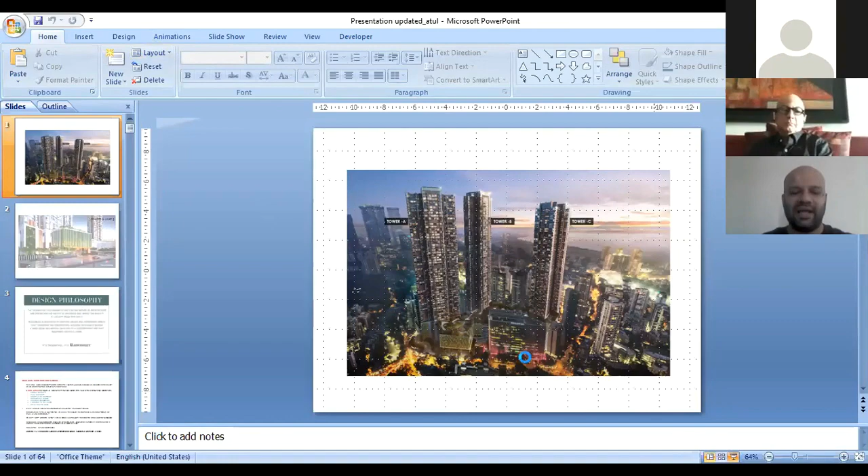I'm also extremely delighted to introduce you to one of India's leading, and I would dare say, one of the top 10 interior designers of India, Mr. Alfaz Miller, who's with us. Alfaz has been associated with Rustomjee not just in a consultative capacity, but he's also done a lot of work in some of our show apartments, and these show apartments look absolutely stunning. I don't really want to introduce Alfaz because I think the design world knows him really well. He's done some stellar work for the GVK International Airports, the Mumbai International Airport, and the Bangalore International Airport. He's also done a lot of work for hotel chains, including the Taj, and of course a slew of corporate clients and the who's who of the upper crust of the city.

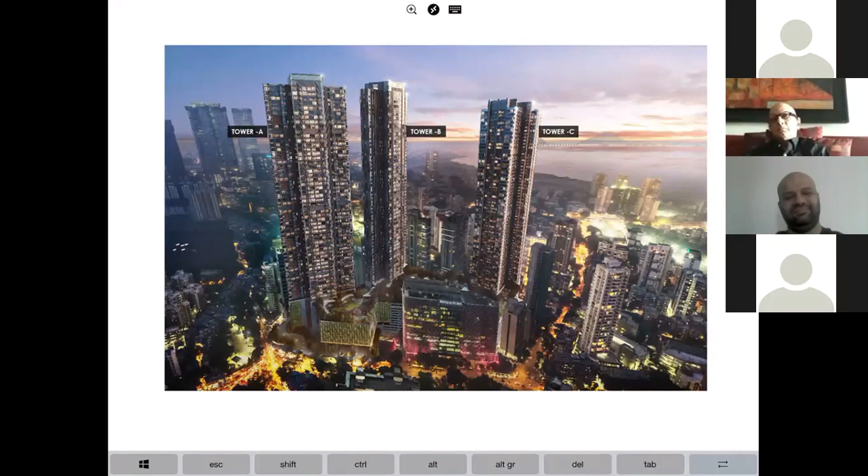So what is the concept at heart? What are the things on which the entire ethos or basis of Crown design stands? It starts with the basic design philosophy that permeates all Rustomjee projects, and we genuinely believe it in letter and in spirit.

I wouldn't read out what's there because everybody can do that. We genuinely feel we need to craft unique and responsive spaces because the lasting nature of architecture and design has the ability to influence and impact the quality of life for those who use it. And this is absolutely true - we've seen it happen in projects. We've seen customers with tears of joy in their eyes when they actually start living in our projects.

So what does Crown offer that is unique? Shekhar talked about it, yes - most of you must have heard it from a salesperson's point of view. Most of you've heard the marketing jargon, the marketing spiel.

But I'm not going to talk to you about rate per square foot, cost per square foot, EMI or payment plans, nothing of that sort. I am here only to talk about what has gone behind in the design, why we feel Crown is unique compared to all the other peers around.

So apart from being an iconic gated community nestled within the concrete and glass buildings you see all around, the prime concept we thought about when we looked at Crown in the entire South Central Mumbai micro market is actually capturing nature in its purest form.

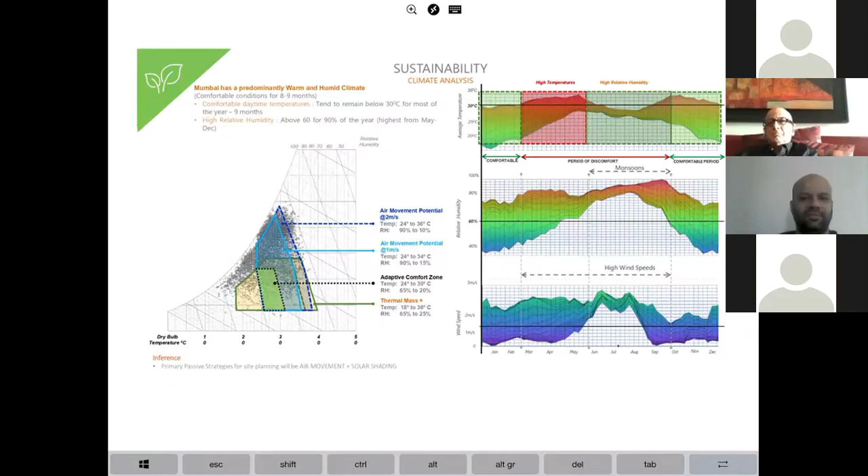One is sustainability, part of the soul, where detailed climate analysis is done. We looked at rainfall, we look at winds, we look at the heat map, we look at all the seasons of the year.

One important thing we also look at in sustainability is envelope design. What kind of envelope should we have for the design? What are the baseline metrics and design considerations we need, from walls, roof, glass, window to wall ratio, the kind of heat that would come in? Because at the end of the day, it is the user who is going to spend his hard-earned money paying that electricity bill, so I should always keep the user in mind.

With post-COVID conditions, how are we allowing visitor entries? How are we segregating different entries - a separate maids entry, a separate guest entry, a separate entry for Ubers and Olas, how is the entry touchless? We had already designed the backbone with this in mind, and we've taken it to the next level, tuned it up, and ensured touchless entry as much as possible, majority addressed with the help of RFID, radio frequency identification device.

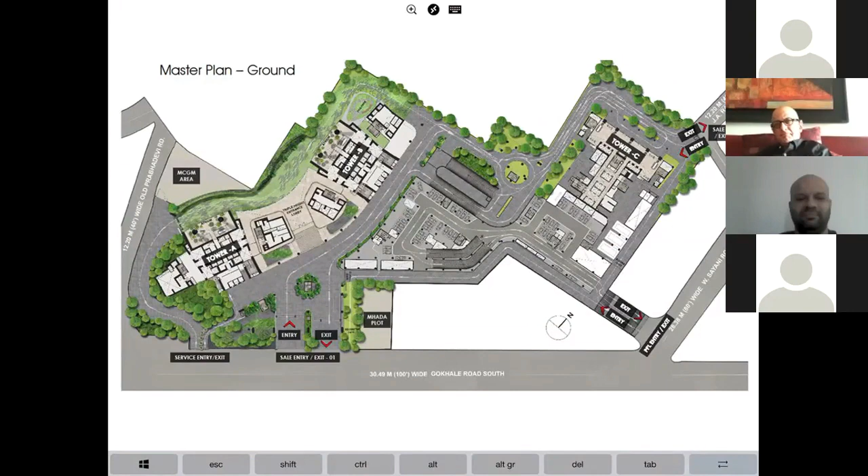So those are the things Shekhar talked about. In terms of the master plan, we talked about segregation of traffic - a separate entry for service staff, a separate entry for sale, a separate entry for fire tender movement, all that is there. We have clearly delineated ramps. Movement in and around the building is something very, very crucial.

At Rustomjee, we strongly believe people don't buy what you do, they always buy why you do it. And what you do simply proves what you believe in. For all of you today, the main aim is to shed more light on the why, or the underlying thought of design. For those who invested, or are on the verge of making that final closure call, understanding this design intent is very important, because it not only affirms belief in the product, but most of you would be pleasantly surprised by the varied, unspoken aspects of the project that deal with dynamic community interaction.

Things like the flexibility of design that we have already planned in the project, you could currently start utilizing now. You suddenly feel, oh, my project has already thought about it. And I think that makes a huge amount of difference. Adoption of technology, renewed focus on well-being of the occupants. Many things are already there. We're just now able to highlight them and showcase them in a much better light. And I think nothing is more important than the well-being of the residents and occupants, and that makes the project adaptable to ever-changing uncertainty.

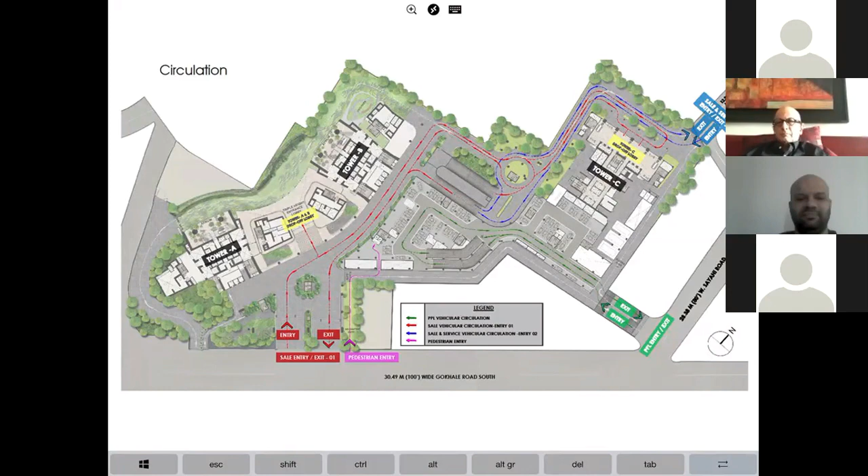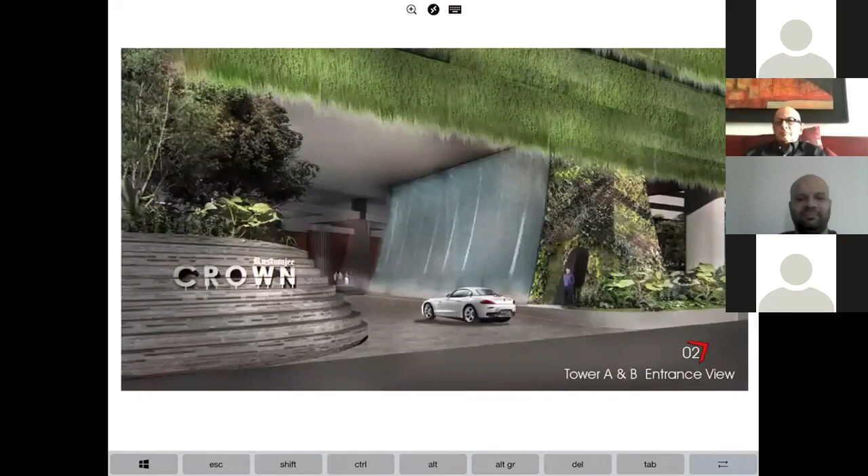So I just love to go through these images. These have already been shown, but the project is so dear to me that every time I look at it, I always get a high. I feel, oh wow, this is something that I'm going to create. This is something that I want to live in. This is something that I aspire for. This is something where I want my guests to come in.

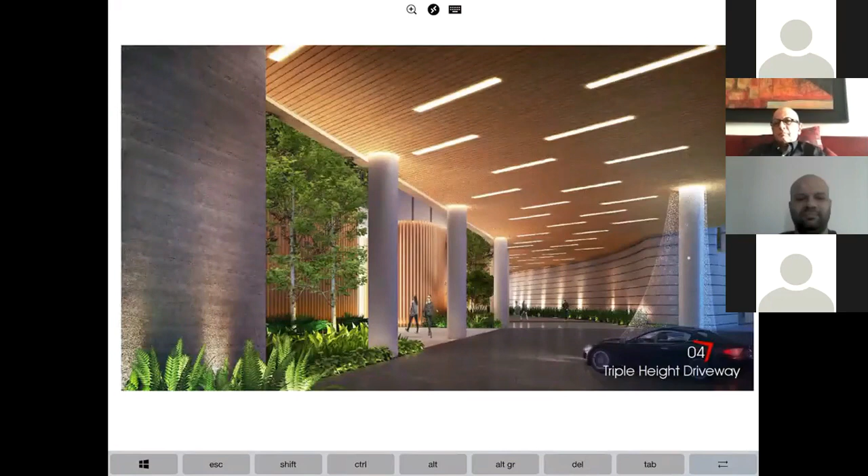Utilization of landscape, utilization of interior design, utilization of the small aspects of lighting - I think this is one change that we've done. If you see in the picture, this is the original concept where you see 40-meter tall atriums with hanging trees. Nobody ever conceived it. There was one tree somewhere in Israel that was hanging, and people made a hue and cry, getting 1 million likes on YouTube. We have hung more than 17, 18 trees at different levels.

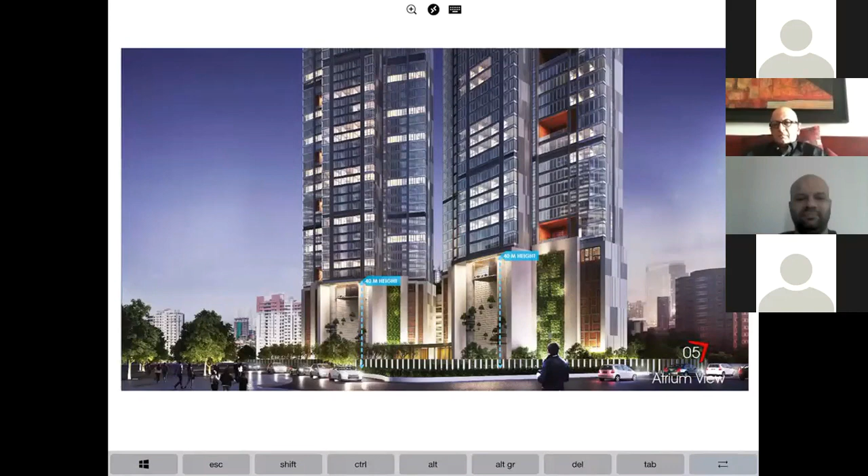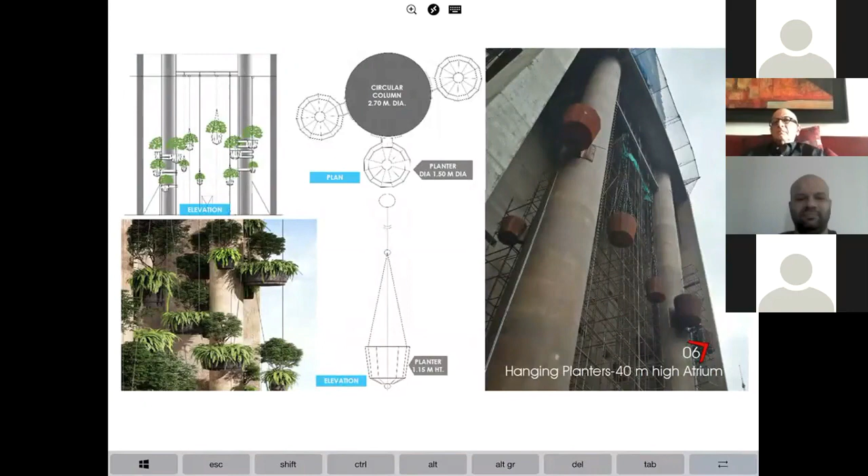So what was it? There was a second lobby of Wing B. We could have easily replicated it there, but we said no, we should do something different. So this was the initial concept. What you see on the right is the hanging planters in that atrium. The planters are more than, some are 8 feet in diameter, some are 10 feet in diameter, to take really, really big trees.

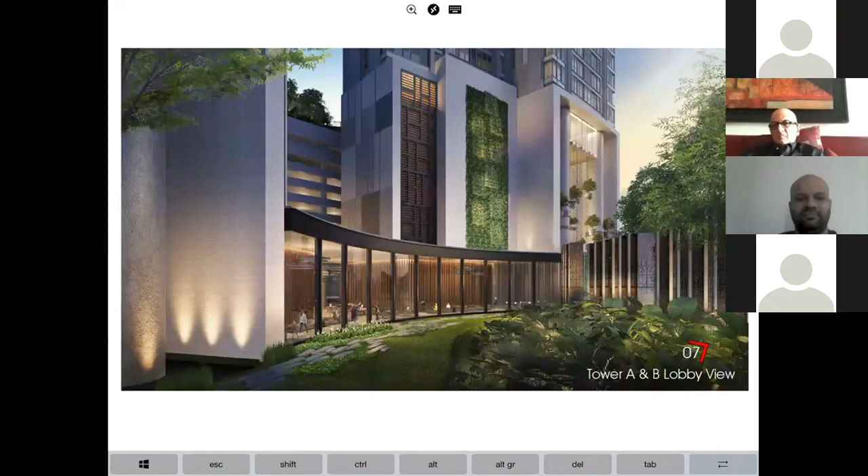So this is what we would actually end up doing at the end of the day, and this is what we would love to create as a final product. But this is what most of you have not seen. Repeating what we did in Atrium A, in Atrium B would have been gutless in our opinion. So we always love to challenge our own self. We said, why not create something that is different, that is more usable than just being visual?

So why not create an adventure playground for kids and teenagers alike? Why not make use of volume to ensure that I have created something which is totally different? Create a concept of a floating tree, or a floating pavilion, or a floating machan as you call it, and then use nature, which is our backdrop for everything we are talking about, to actually enhance the space and make it more utilitarian.

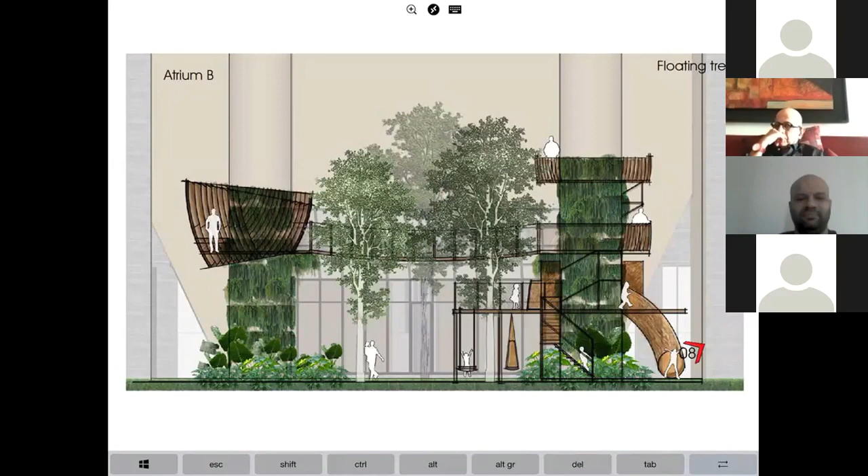I think the way we talked about the master layout podium amenities - when we designed that, people felt, why create so many places, the space will look small, small, small. The answer is no, my friend. The space looks better because you experience it better. The aim was always to declutter, to decentralize and de-densify amenities so that they are spaced out. People can use them in varied age groups and each amenity can be used differently.

And things like intelligent elevators was something that we thought of already, we just adopted it. We just had to upgrade our software to ensure that we have touchless entry - nobody touches any elevator panel. You can call the elevator from your mobile. If the elevator is under maintenance, you will already be informed. There is an anywhere destination control system. So in terms of technology, wherever the technology has reached right now, we are already there, and we've kept the backbone for any future improvement.

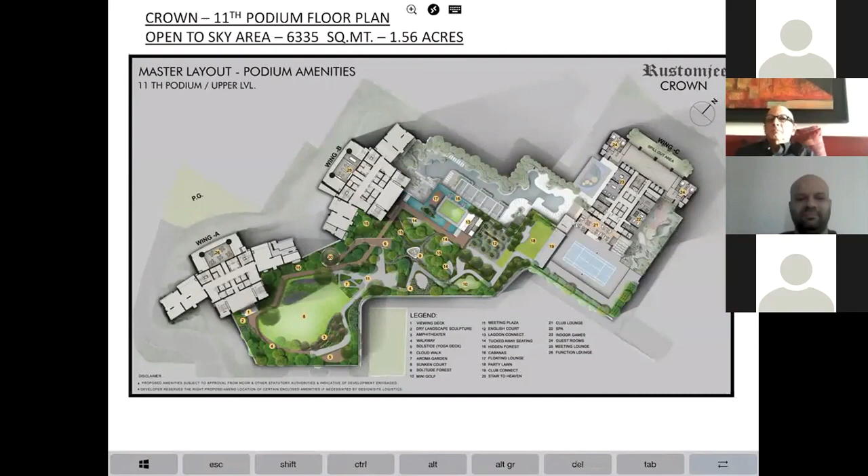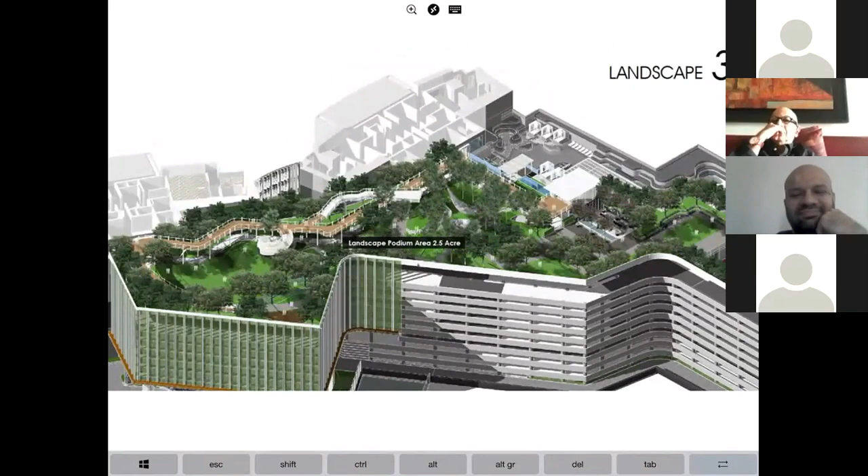The things about two separate ramps, the car parking areas, the way we look at landscape, where we look at indigenous nature of landscape. This is landscape without the trees, and this is landscape with trees. Whale of a difference, simply because it is a softscape that gives life to it.

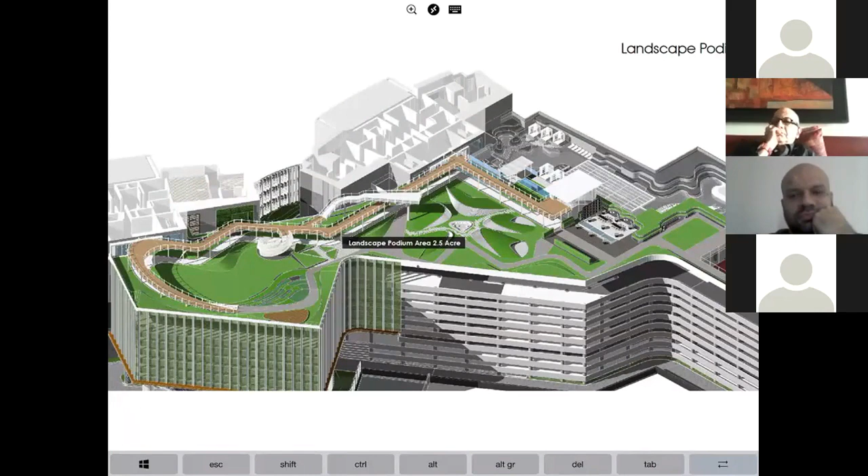The multi-level boardwalk, or the walk as you call it, at different levels, actually lets you experience landscape at multiple planes, at the ground plane, the mid plane, the top plane. So you see the treetops, the branches, the foliage underneath. And everything has a thought - why landscape at this height, at that level?

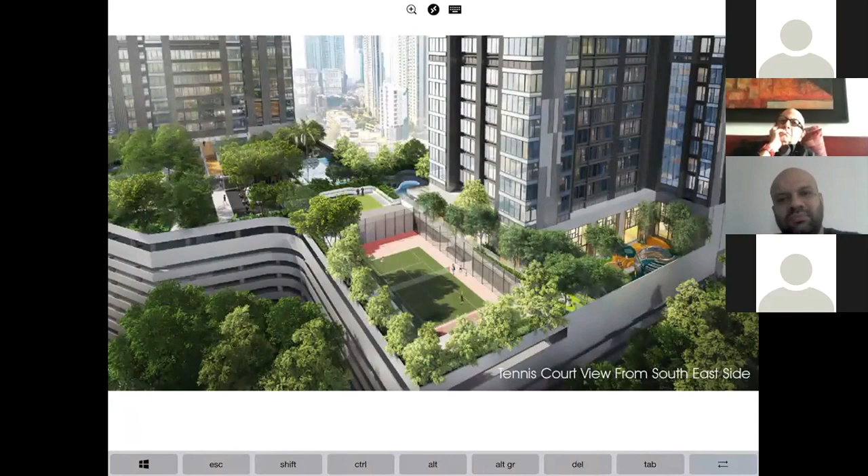Simply because this is an urban location, and there is a problem called urban heat island. So the amount of landscape that I have absorbs the entire heat generated from the reflections of the glass, the reflections of the concrete, the reflections of infrared radiation that is all around. The temperature on this podium is going to be 4 to 5 degrees lower than any other podium. I can bet you that, simply because of the level of landscape that we have.

The kind of water body that we have, a falling cascade - why? Because I want to reintroduce that level of water vapor, that level of moisture in the atmosphere, so that it doesn't feel dry and sultry. So there is a thought behind it.

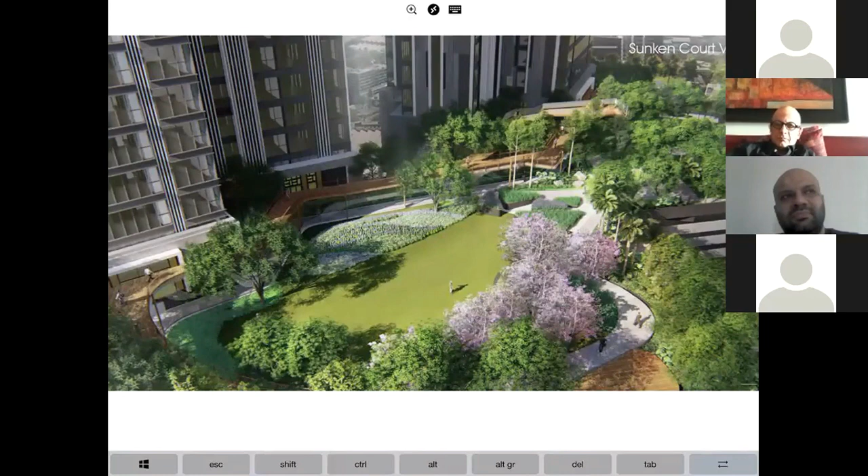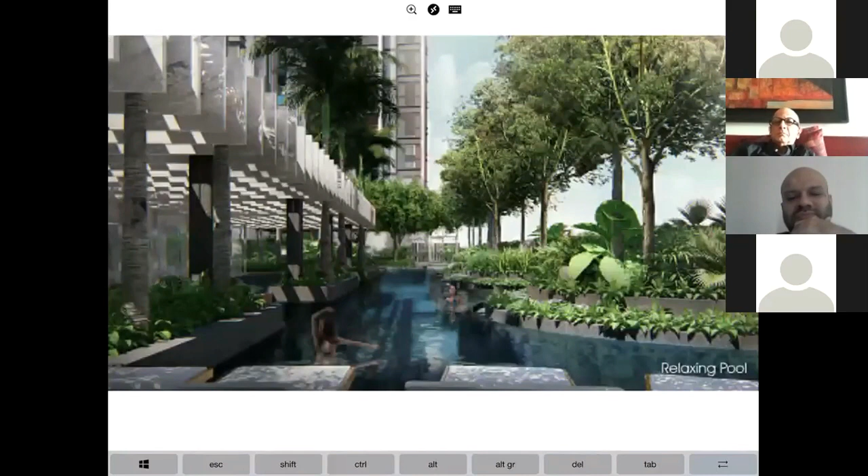Look at the level in which the pool was thought about. It is an all-weather pool, obviously there as a part of the lagoon. So you have a relaxing pool, a pool got an outdoor theater, a leisure pool, a shallow pool where people just come to have fun and frolic, and then you've got the lagoon pool. I'm skipping them fast because all of you have probably seen all these images.

And the Cascade Waterfall - this is what we are talking about. When the water cascades down, it loses heat to the atmosphere. I can use that to actually cool this entire place down.

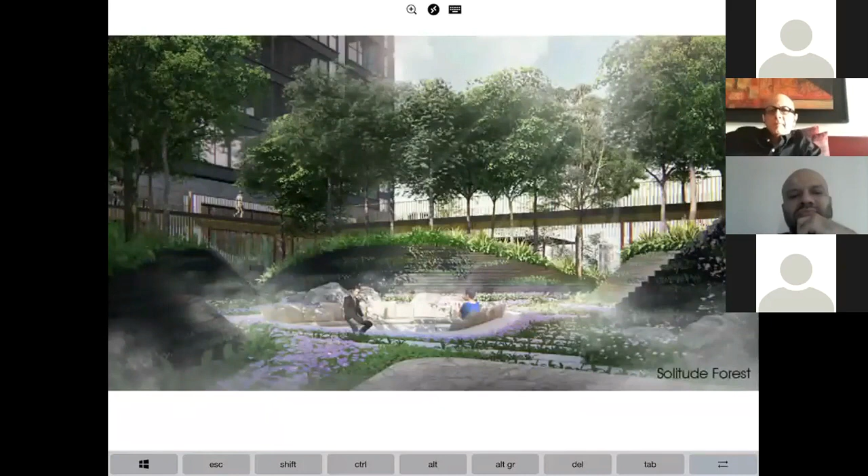Then there are misters and foggers, and then there are actually speakers in this entire landscape, because my environment cannot be dead in the night or in the evening. It has to be throbbing, dynamic all year round. So the kind of landscape or trees that we've selected will be flowering across seasons - it's not that only spring flowering is there, it will be flowering across seasons.

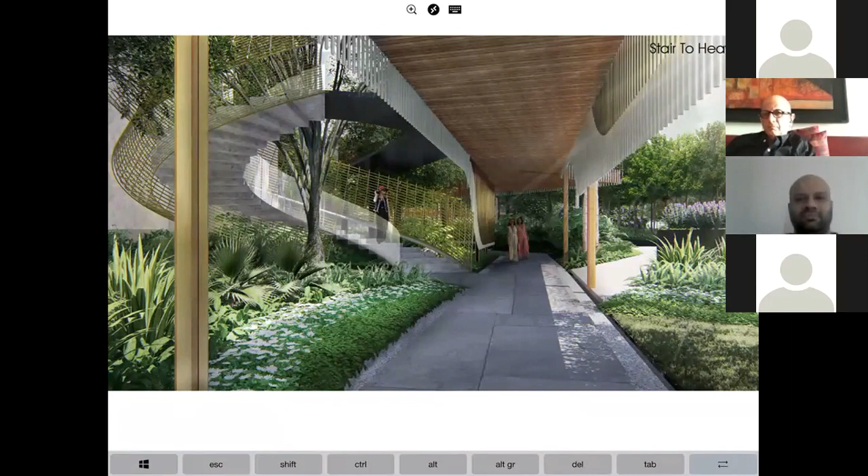Also see this, we have a boardwalk on top. How does it help us? During the rainy season, if I still want to access all the amenities at different levels, it actually serves as a covered walkway. So it serves both purposes. There is a design, and then there is a thought behind the design. It's not just done because it looks good, it's because it serves a certain purpose. And I think understanding that makes sense.

Having a large elevator with 7 feet wide doors to transfer your furniture - I doubt how many projects in South Mumbai or South Central Mumbai have it, and this is one of our projects. The speed of this elevator is almost 6 meters per second. So with the kind of speed that we are having, this is great.

Facade lighting, something that we looked at - the concept of fireflies, where when there is pitch dark in the night, the things that you see in the atrium, in those hanging planters, would be just nice, beautiful LED lights which actually replicate the concept of fireflies.

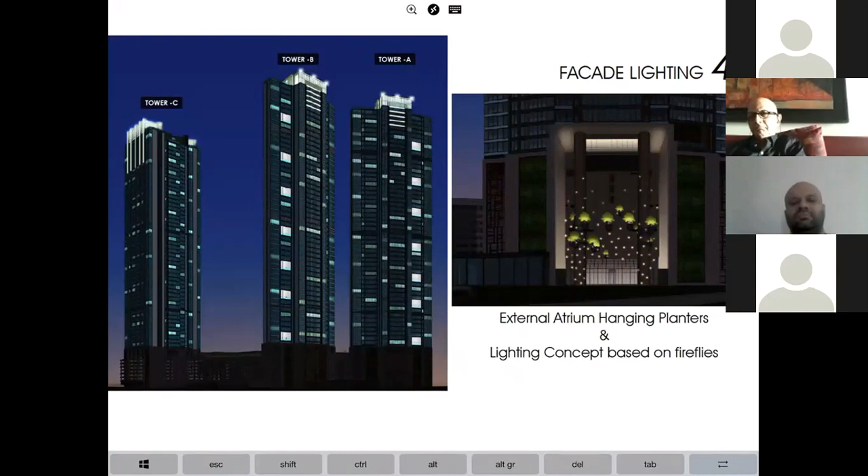Because finally, we feel it is all about the ambience, it is all about the romance that you actually create. Because finally the product is the same - it is a fine difference between eating out and dining, and I think that is what makes a difference. So long as you titillate all the 5 human senses of sight, sound, taste, feel, touch, and everything that goes into it, it will make an amazing product.

Facade, I already spoke about - first time, full height, integrated, unitized sliding window.

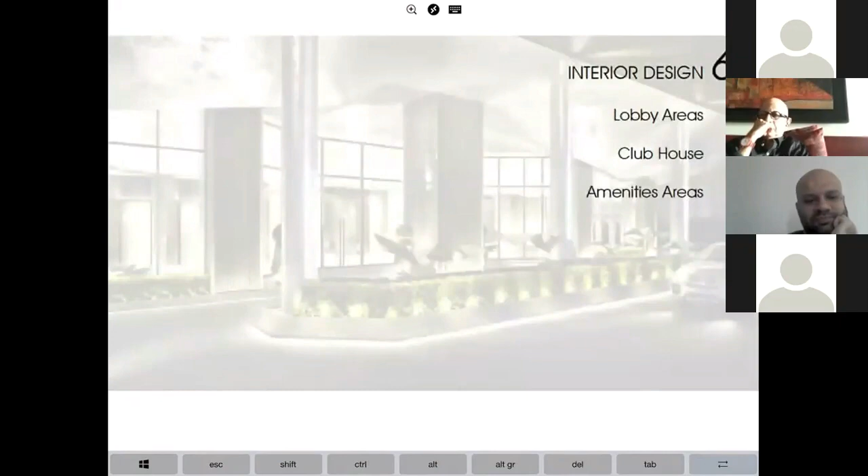Interior design - I think Alfaz has spoken about it in a broad amount of detail, spaces conceived by PIA. Alfaz, with all his experience in the field, has been in this field for so long that the amount of projects he's done, you would possibly need a separate webinar for them. His experience lends so much belief in the product. He's worked with us, a great friend of mine, an amazing designer, and has the thought of sustainability, all the things he talked about in his webinar, always at the back of his mind.

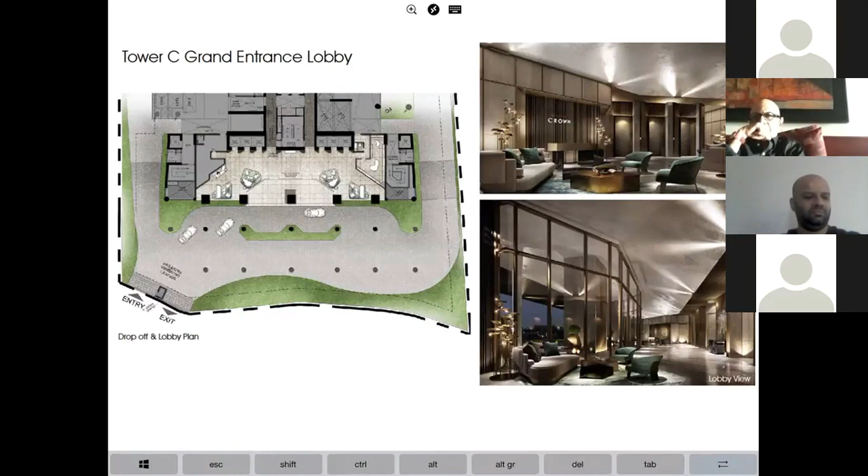He's the person who's actually so close to art that he's almost engineered it and used it in all his projects. Since Alfaz is the consulting designer for this, he has taken over the mantle of project management. So it is in good hands. We have not left it to a typical interior contractor because there is no soul there - Alfaz brings the soul to our design. So PIA might be the designer who's thought about it, but finally Alfaz will ensure that entire ethos of design is translated into what we actually do in our lobbies, in our public spaces, in everything we are looking at. I've run through all these images because it's very clear this is what we have already seen.

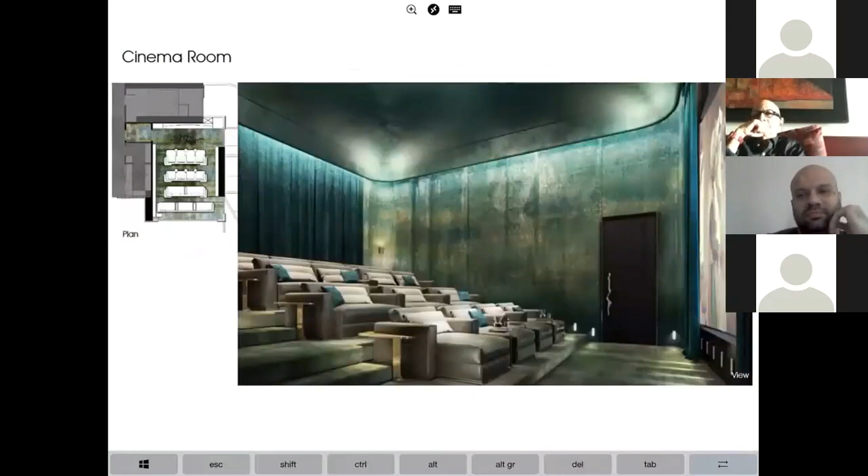And things like Atul... sorry. Okay, sorry to interject you. We've been getting a few questions on chat, and I think this is a good time to touch upon some of those, so let's get a few more in.

One question I'd like you to touch upon is there's been a lot of talk about contactless interface, both in common areas and possibly in things like elevators, when entering the premises, when you want to use some of the facilities. There's been a lot of talk happening around it, and I was also having a chat with Harun the other day - ladies and gentlemen, Harun Siddiqui is the head of our mechanical, electrical and plumbing department and works very closely.

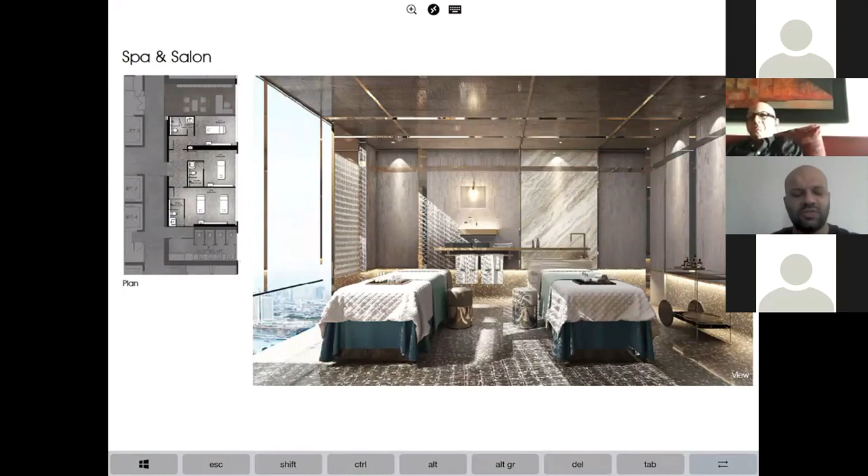Yes. I'm not able to hear you, Shekhar. Sorry, can you hear me now, Atul? Is that better? Yeah sure. All right, I'm saying, can you touch upon some of the aspects of a contactless interface that becomes very relevant and important in an environment like this?

Absolutely. As I said earlier, we always had a backbone of design, and I genuinely feel that MEP services - mechanical, electrical, plumbing, and now low voltage, meaning internet-based services like broadband and Wi-Fi - we always had the backbone for it.

When we looked at the way everybody's talking of the new normal, the new way of life people are going to live possibly in the immediate future and the far foreseeable future as well - everything in Crown, right from the time you enter the gate as a resident, or even as the esteemed guest of a resident, every experience will be contactless. Right from the barcode sent to your mobile phone, which you hold close to a scanner to scan, so you don't need to press any button or speak with anybody. You scan it, and then you enter an elevator, or open a boom barrier. That is one part - absolute touchless.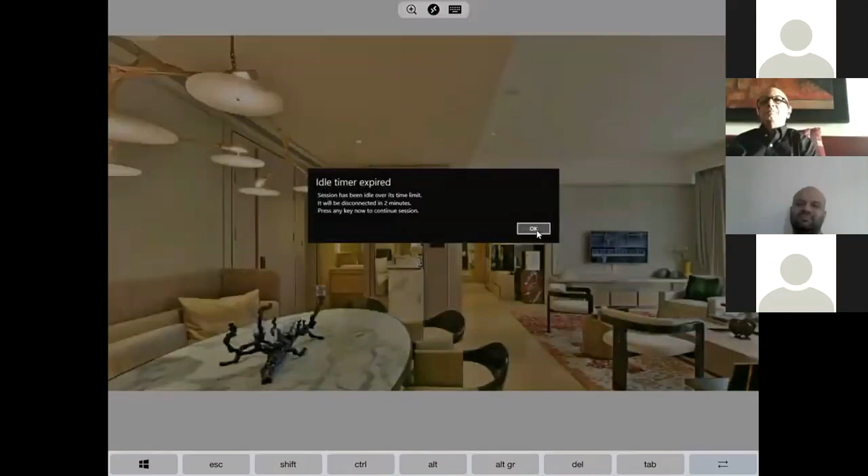You talked of volatile organic compounds in paints. None of the paints that you have in Rustomjee have VOC in them, so that is a given. We do not want people here to have any respiratory diseases or so, because we feel the physical and emotional well-being of our people is extremely important.

At the same time, things like radio towers, mobile towers - what is the kind of radiation that you get? What is the kind of heat ingress that you have? So considering all aspects of sustainability, if I would actually look at the LEED participation, if I took Crown and started counting my LEED ratings, I would possibly be in gold LEED certification.

So do I want to genuinely do it? People do it mainly because they just want one more certificate attached to them. But I genuinely feel we should do it from a point of view of the correct ethos, the correct way in which we need to work. And I think that would actually make my project sustainable in the true sense.

And Shekhar, in my opinion, I think I have covered everything that has to do with sustainability.

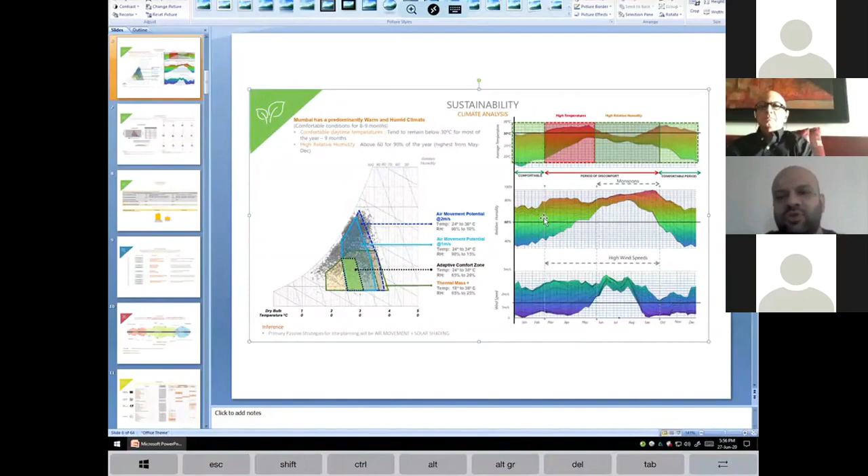I think you can take Alfaz on. Shekhar, you've accidentally gone on mute. You'll have to unmute yourself. Atul, sorry, there's a question - I was on mute. There's a question I'd just like you to touch upon briefly, so that I can go to Alfaz, because there's an important question for him to answer.

Somebody asked that given Mumbai has such humid weather, especially in the rainy season where precipitation is extremely high, there's a common finding in homes where moisture accumulates either on furniture, other surfaces, or even on walls as droplets. Now I understand we've got a fully openable glass facade, unique in its sense, allowing a huge amount of free airflow. But in monsoon, is there a way for people to look at dehumidifiers in their rooms? What is your view on using dehumidifiers inside the home?

Dehumidifiers are a good thing, Shekhar. It's not a bad thing, because unnecessary moisture gives rise to fungus, especially if you are not staying in a room. So if you have moisture in possibly your wardrobe areas, it's not a great sign.

But the basic thing behind it is designing air conditioning right, ensuring the flow of air conditioning is such that I have enough amount of return air. All Crown apartments are centrally air conditioned. We are using VRV units - inverter based VRV units of the topmost quality, which also ensures the electricity bill our people will have is extremely less.

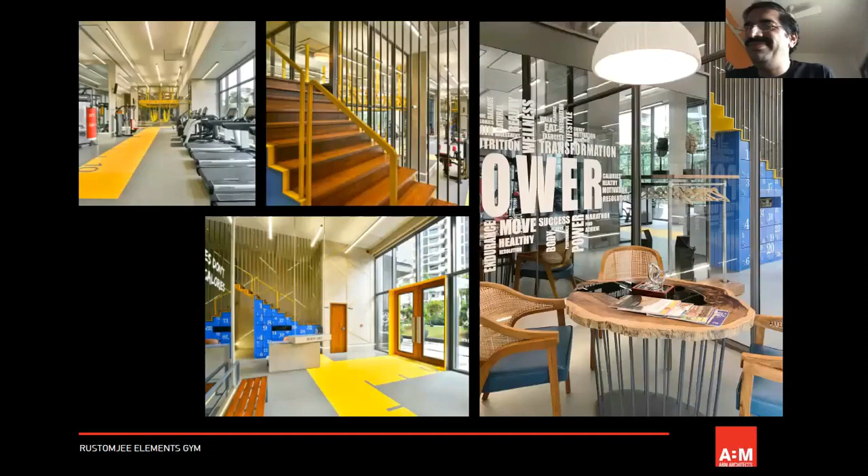What you're seeing now is the gym at Elements. This is where Bollywood lives, this is where all these actors exercise. It's a wonderful thing, and this is done with passion. We've done the indoor games, we've done pool rooms. This is an indoor game facility for Rustomjee.

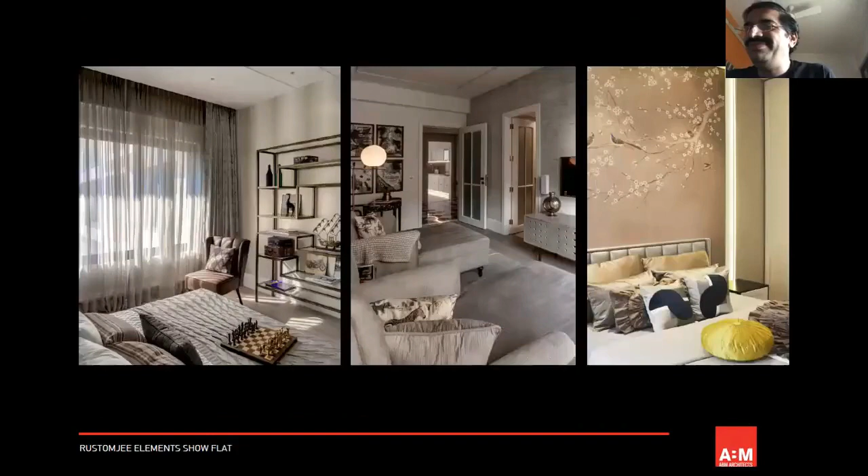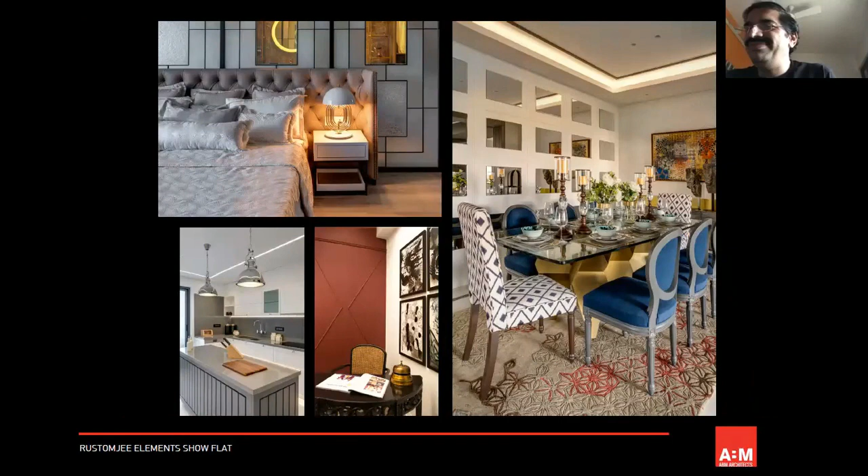Thank you very much, Atul. Thank you very much, Alfaz. I'm sure the passion with which we are making these homes has been seen and heard by our customers today. There's just one line I'd like to add - a lot of our customers who've booked previously have been waiting for a long time for their homes to get ready, and I'd like to use this line: difficult roads often lead to beautiful destinations. Let me assure you, on behalf of Rustomjee and both these gentlemen, that we leave no stone unturned in ensuring that you come home to a marvel, a destination as beautiful as you've always had it in your minds, and maybe even more.